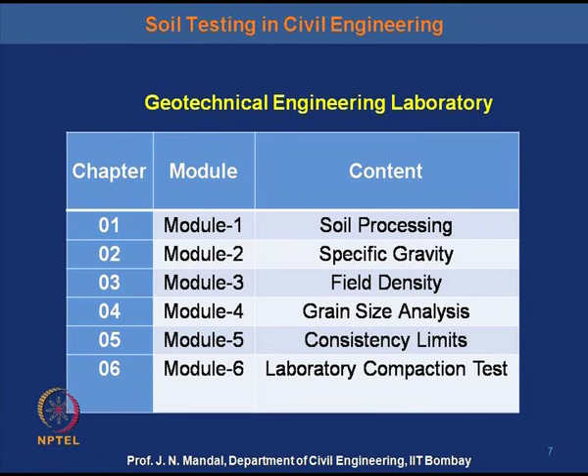The geotechnical engineering laboratory will cover module 1, soil processing; module 2, specific gravity of the soil; module 3, field density; module 4, grain size analysis; module 5, consistency limit of soil; module 6, laboratory compaction test; module 7, laboratory permeability test; module 8, shear strength test; and module 9, laboratory consolidation test. So we will cover all this in the lectures.

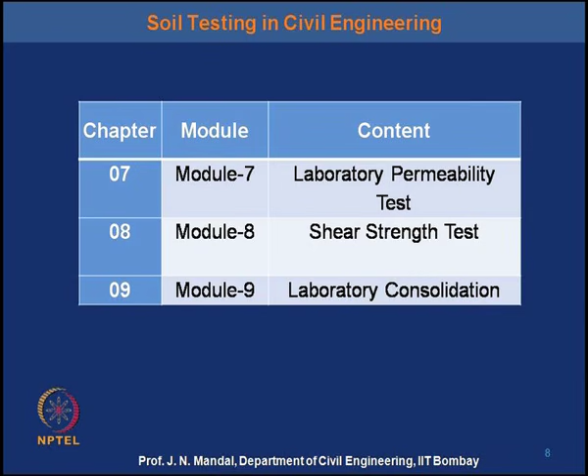So what are the target audiences for this course? This course will be very much useful to undergraduate and postgraduate students and researchers in civil engineering, earth science, geology and geotechnical engineering.

Consulting or practicing engineers, government officials, policy and decision makers and implementation NGOs, professors, specifiers, project designers, distributors, contractors and manufacturers.

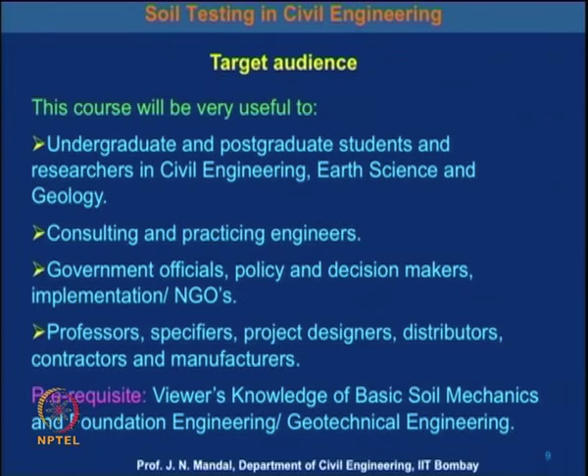The requirement or prerequisite for this course is knowledge about basic soil mechanics and foundation engineering or geotechnical engineering. One should know these prerequisite courses; then it will be very much helpful to know how to perform the different types of soil testing.

I am giving some references which you can go through, which will be very much helpful to you. The author Bowles J.E., 1979, Physical and Geotechnical Properties of Soil, McGraw-Hill publisher. There is also the code specification BS 1377 part 1 to 8, method of test for soil for civil engineering purpose, from the British Standard Institute.

Then Head KH, 1982, Manual of Soil Laboratory Testing, and IS 2720 various parts, the method of test for soil, from the Bureau of Indian Standard.

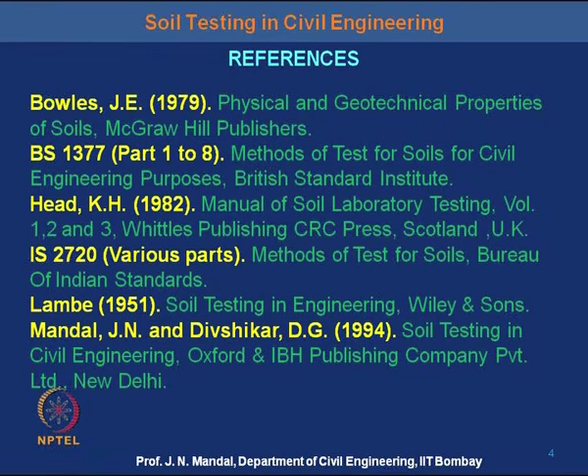There is also a book by Lambe, 1951, Soil Testing in Engineering, Wiley and Sons. Apart from that, you can go through the book by Mandal JN and Divshikar DG, 1994, Soil Testing in Civil Engineering, Oxford and IBH Publishing Company Private Limited, New Delhi. So one can go through these references.

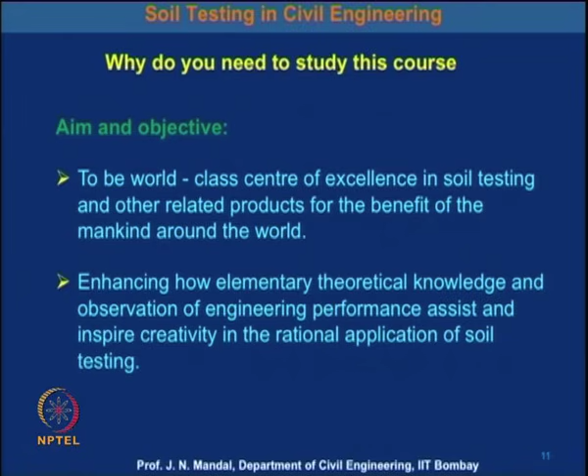So why do you need to study this course? Our main aim and objective is to be a world class center of excellence in soil testing and other related products for the benefit of mankind around the world, enhancing elementary theoretical knowledge and observation of engineering performance to assist and inspire creativity in the rational application of soil testing. With this aim and objective, we can start chapter 1, soil processing.

This is very important - how to process the soil. For this aim and objective, first of all you have to collect the soil, then break the lumps and clods in the given soil, then separate it into representative samples to determine the hygroscopic moisture content of the soil.

So with this aim and objective, we go to the introduction. A fully representative soil sample as received from the field shall be used. The clods should be broken with a wooden mallet, that is a hammer, quickly, without breaking the individual solid grains. The organic matter like tree roots or pieces of bark and shell should also be separated from the main soil mass.

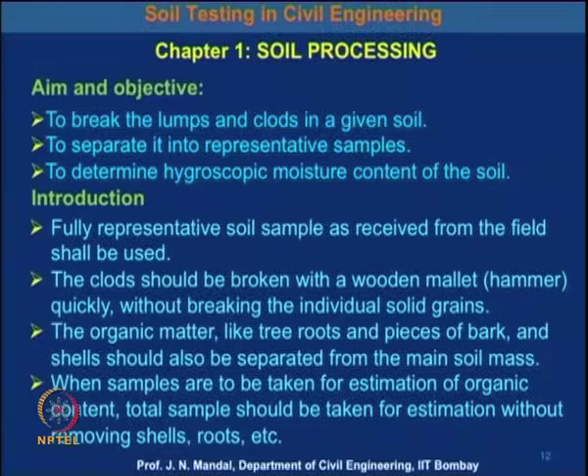When samples are to be taken for estimation of organic content, the total sample should be taken for estimation without removing the shell, roots, etc., whatever it contains. So one has to be careful about how to process the soil.

Now the pulverization of the soil is carried out, and the pulverized soil is passed through the required sieve until sufficient quantity of soil is obtained.

So we have the number of the sieve. This is the size of the particle, more than 90% passing, and these are the sizes: 0.425, 2, 4.75, 9.5, 19 and 37.5. This is the quantity of soil required for water content determination, and the size of the maximum material present in substantial quantities.

You can see here that the minimum mass of the soil specimen is 25, 50, 200, 300 when passing through this sieve, 500 and 1000.

Similarly, maximum size of the material present in substantial quantity is again 75, 37.5, 19, 13.2, 9.5, 6.7 and 4.75, and mass of the soil in kg is 60, 25, 6.5, 3.5, 1.5, 0.75 and 0.4.

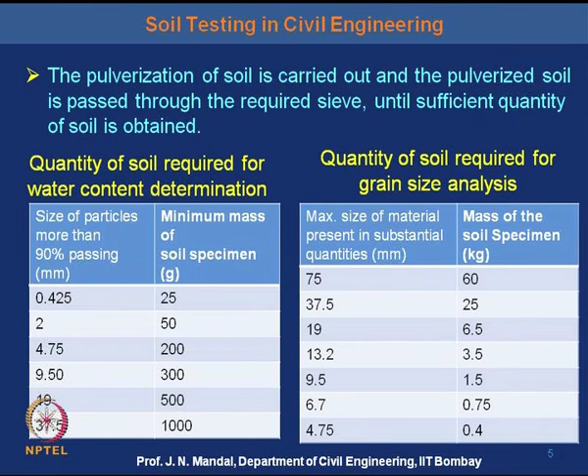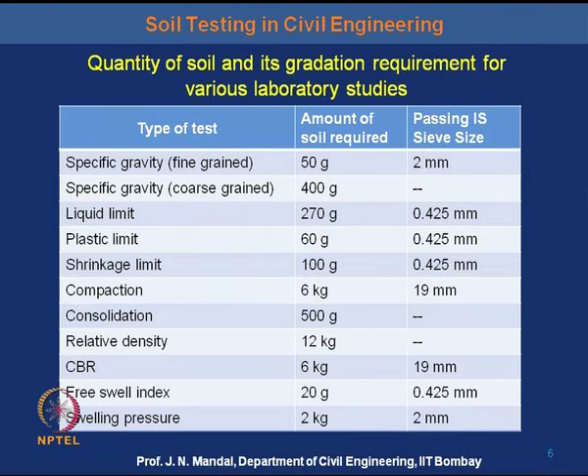So one should know the idea about how much quantity of soil is required for each specific kind of testing, and what should be the passing sieve size. This one should know initially for any kind of soil testing.

So for soil testing you require some equipment and accessories. You require a galvanized or enamel tray, a bit bigger in size. You need a wooden or rubber mallet. You require a scoop, spatula, and a container for preserving the soil sample.

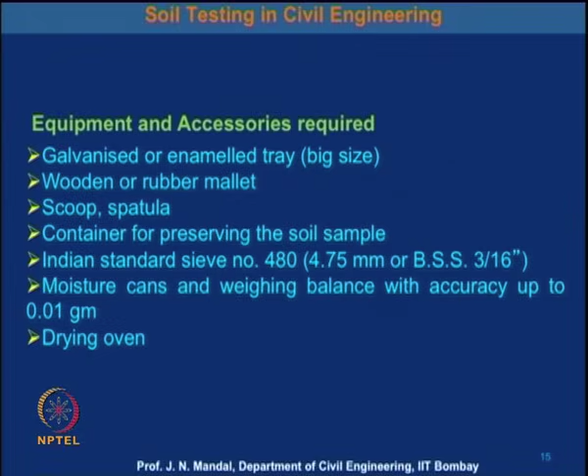Then you also have to follow the Indian Standard sieve number 480, that is 4.75 millimeter, or BSS 3/16 inch. Then a moisture can, a weighing balance with accuracy up to 0.01 gram, and a drying oven. So these are the equipment and accessories required for soil testing.

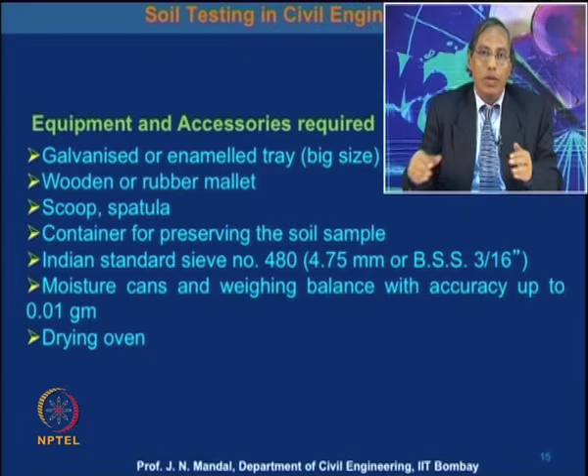I will show you some of the equipment and accessories in my next slides. So these are the equipment required.

At a particular temperature and time, the soil can be dried, and then you can determine the weight of the soil and the weight of the dry soil, and also determine the moisture content of the soil.

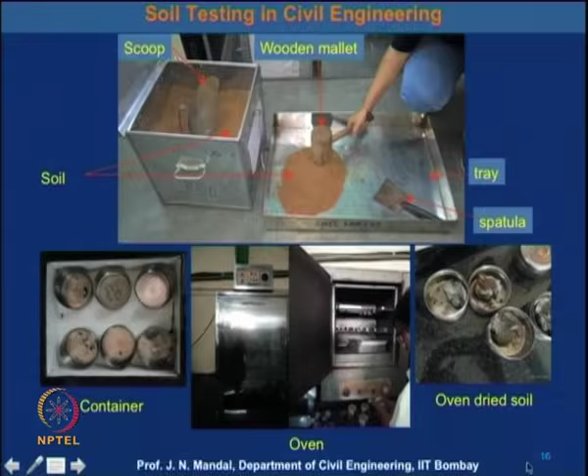So next we will go for the procedure.

Write the soil number, whatever soil you collected. You should know what kind of soil, what will be their number, what will be the batch and the group on the identification slip, and paste it on the tin containing the soil sample. Then transfer all the raw soil from the tin to a big size galvanized iron tray.

Pound the soil with the rubber mallet until all the big soil clods and lumps are properly broken. After pounding, the overall soil is thoroughly mixed with the scoop, so that a proper representative soil sample can be taken.

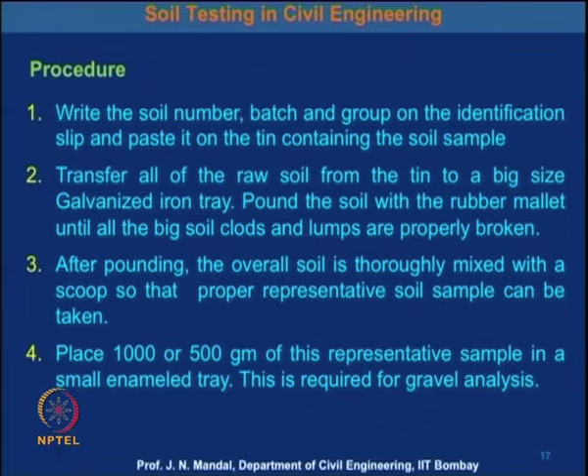Place 1000 or 500 gram of the representative sample in a small enameled tray, and this is required for the gravel analysis. Whatever the amount is at the end, you have to collect it, and that will be required for further gravel analysis.

Soak the soil placed in the enameled tray by adding water until the soil is completely submerged. Add a pinch of sodium carbonate to the soaked soil to enhance the separation process, so that the soil does not clog and can be separated properly.

Pass the remaining soil from the big tray through the IS sieve number 480, or 4.75 millimeter diameter opening. The soil sieved through IS sieve number 480 is then stored in the tin. This soil will be required for the subsequent experiment.

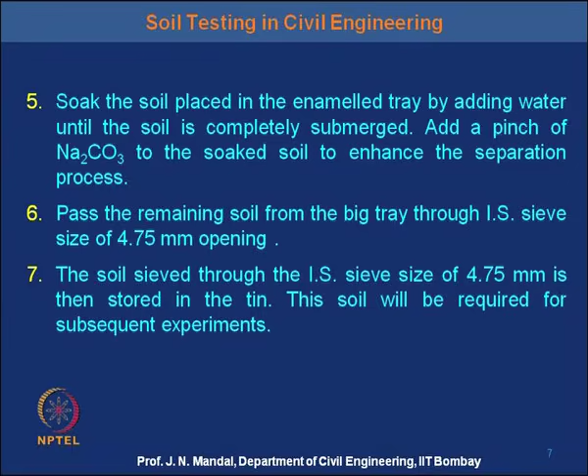Next, we will determine the moisture content of the soil, or the hygroscopic moisture content. For any kind of testing of the soil, initially you should know the hygroscopic moisture content in the soil and how to determine it, because moisture content varies from place to place, soil to soil. This is very important to determine, and I will explain how you can determine the moisture content of the soil.

The procedure is: first, note the number of the moisture can in which you have to keep the soil. Second, weigh it accurately and determine the empty weight of the moisture can provided for the purpose, along with the lid. Let this weight be W1 gram.

Third, take about 20 to 30 grams of the given soil in the can and weigh it again. Let this weight be W2 gram.

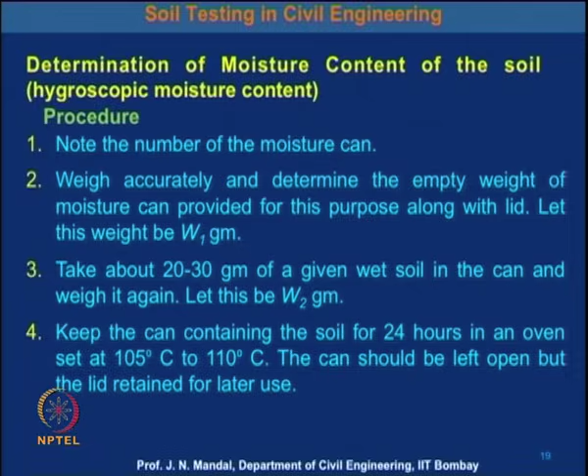Then keep the can containing the soil for 24 hours in an oven set at 105 to 110 degrees centigrade, and this can should be left open, but the lid retained for later use. You should know how to put the soil into the container and into the oven for drying at a particular temperature of 105 to 110 degrees for 24 hours. Then the entire soil will be dry.

After completion of the drying, cool the container in a desiccator to room temperature, then weigh it. Let this dry weight be W3 gram.

Now, knowing all this data, you can determine the moisture content of the soil. The definition of the moisture content of the soil is the ratio of the weight of water to the weight of solids, multiplied by 100, since this is in terms of percentage.

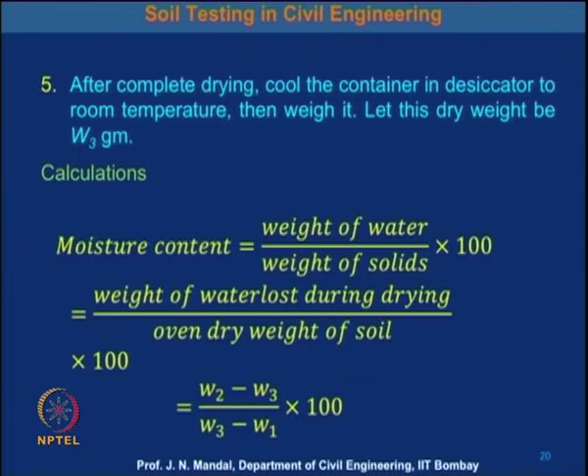So whatever weight of water is lost during drying, divided by the oven dry weight of the soil, multiplied by 100. In the beginning, this weight is W2, the weight of wet soil, then W3 is the dry soil, and dry soil plus W1 is the weight of the container. So you divide W2 minus W3, divided by W3 minus W1, multiplied by 100, which will give you the moisture content of the soil.

I am giving a specific calculation for hygroscopic moisture content. One should know, as I told you, the can number. You can repeat this test 4, 5, or 6 times and take the average to determine the average hygroscopic moisture content of the soil.

I am showing one example: the can number is 251, which is to be pasted on the can to remember that this is can number 251. Then you take the empty weight of the can and lid, which is W1 gram, that is 38.960. Then you take the weight of the can and the soil, that is W2 gram, that is 54.322. And the weight of the can, lid, and dry soil, that is W3 gram, that is 53.167.

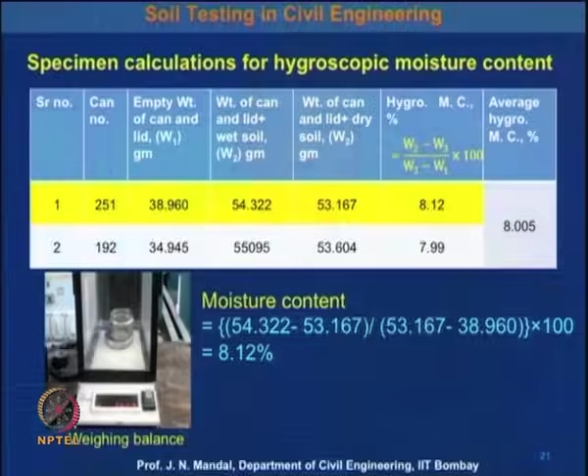This kind of equipment we generally use. Now you understand how to calculate the hygroscopic moisture content of the soil.

This is the specific calculation for different soil, or the field moisture content. Similarly, you can go through different types of soil cans, define the weights, and calculate the moisture content. The details have been given here.

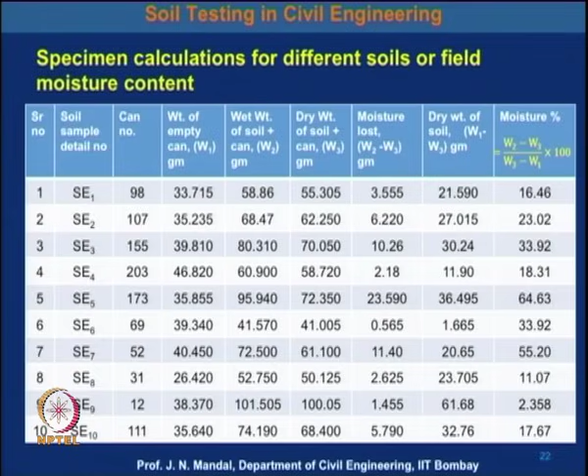Next, we have to determine the specific gravity of the soil. You know how to determine the hygroscopic moisture content of the soil. Now we will determine the specific gravity, and moisture content is very important for any structure construction. You should know what the moisture content of the soil will be on the site.

Next is the determination of the specific gravity. The aim and objective is to determine the specific gravity of the soil. Specific gravity of the soil solid can be defined as the weight of a given volume of soil particles to the weight in the air of an equal volume of distilled water at a temperature of 4 degree centigrade. It is used in relating the weight of soil to its volume.

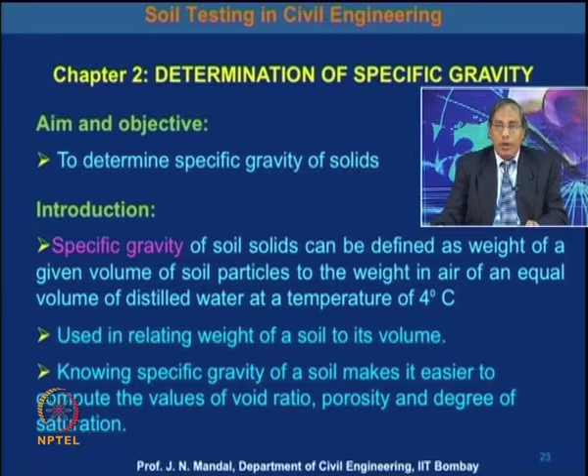Knowing the specific gravity of the soil makes it easier to compute the value of void ratio, porosity, and degree of saturation. This is a very important parameter - from the specific gravity you can determine the void ratio, the porosity, and the degree of saturation of the soil. So specific gravity is also very important for determination of other parameters.

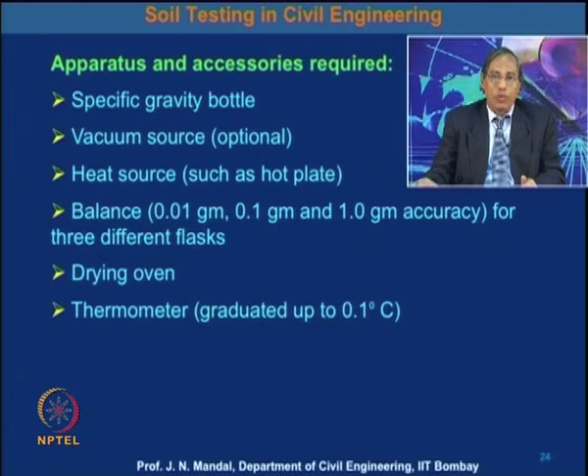For the determination of specific gravity, we require certain apparatus and accessories. First you require the specific gravity bottle. Then a vacuum source, that is optional, a heat source such as a hot plate. You require a balance with 0.01 gram to 0.1 gram and 1 gram accuracy, 3 different flasks, a drying oven, and a thermometer graduated up to 0.1 degree centigrade.

These are the types of apparatus required for specific gravity testing. This is the hot plate, this is the oven, and this is the weighing balance in which we can weigh. This is the 500 ml flask and this is the specific gravity bottle, in which you can determine the specific gravity of the soil, and you have to maintain the temperature. So you also require a thermometer to measure the temperature.

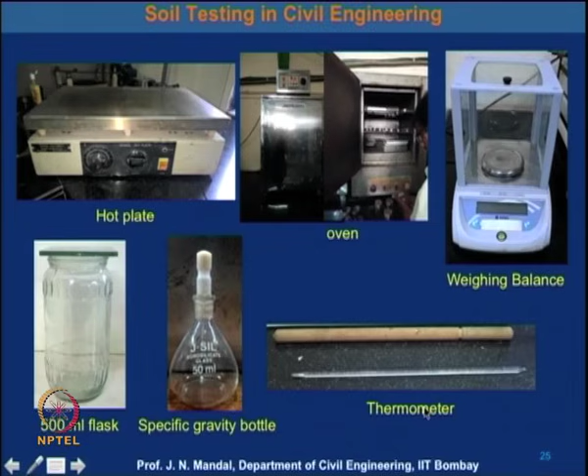The procedure for specific gravity: first determine the hygroscopic moisture content of the soil sample passing through a 4.75 millimeter sieve. Clean and dry the specific gravity bottle with the stopper empty, and let this weight be W1. Take about 15 to 20 grams of oven dried soil passing through the 4.75 millimeter sieve into the specific gravity bottle, stopper the bottle, and weigh again - let the weight be W2.

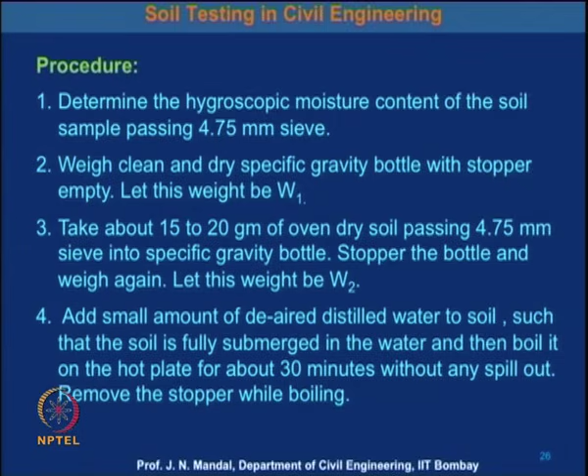Add a small amount of distilled water to the soil such that the soil is fully submerged in water, then boil it on the hot plate for about 30 minutes without any spill out. Remove the stopper while boiling. Cool the bottle to room temperature, fill it completely with deaerated distilled water, and replace the stopper correctly. Wipe the surface of excess water and weigh the bottle - let the weight of the bottle be W3.

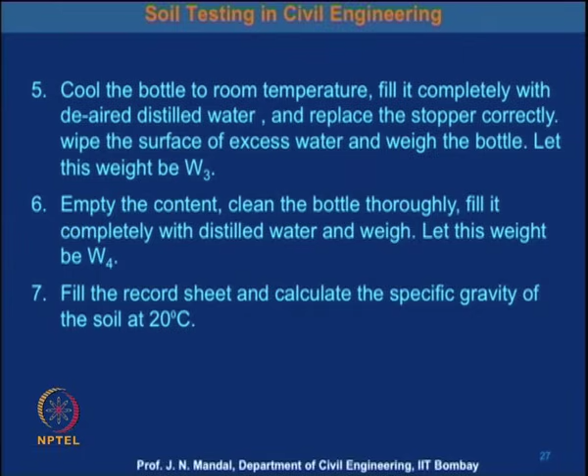Empty the content, clean the bottle thoroughly, fill it completely with distilled water and weigh it - let the weight be W4. Then fill the record sheet and calculate the specific gravity of the soil at a temperature of 20 degree centigrade.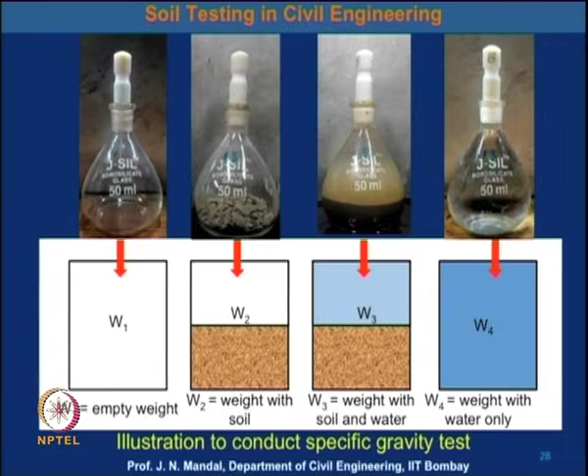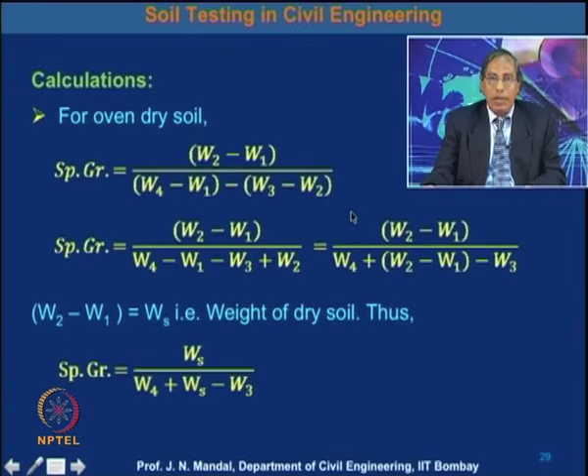How to calculate the specific gravity for oven dry soil? Specific gravity is equal to (W2 minus W1) divided by [(W4 minus W1) minus (W3 minus W2)]. This can also be written as (W2 minus W1) divided by (W4 plus W2 minus W1 minus W3). Since W2 minus W1 equals Ws, the weight of dry soil, specific gravity equals Ws divided by (W4 plus Ws minus W3). Knowing this data, you can determine the specific gravity of the soil.